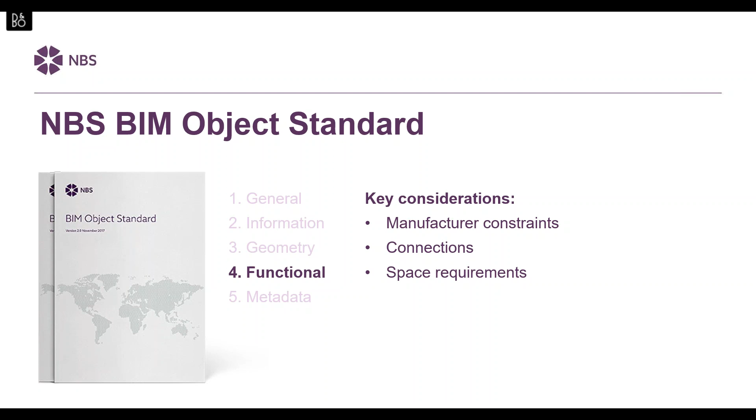So a door is a good example where it could come in 6 standard sizes, but an end user may actually want a bespoke size. So we just need to build in that sort of functionality. Things like connections: does pipework for a boiler, for example, need to be connected in a model? It most definitely would, so we just need to build in that functionality. We also need to consider things like space requirements, so access zones are really good to include.

And then finally, we need to think about how we name objects. I think it's just human nature that even across an office, somebody will call something completely different from somebody else. So we just need to be consistent in how we name BIM objects, the materials, the files themselves. File naming is quite important, and it does help if you save objects onto your server. As a designer, if the structure is correct and the fields are populated as they should be, it's then really easy to filter down and find what you're looking for.

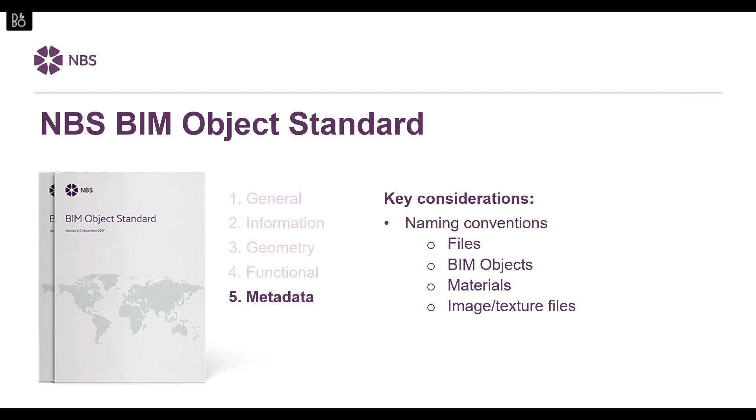So the final section for me is really to think about BIM object suitability. Not everything would need to be created as a 3D object. And I've got a few examples here on the screen. Some of these are to do with the software limitations themselves, and other examples are just products that you just wouldn't attempt to model to this level.

So if you think about the thousands of meters or even miles worth of cables that could be within a building itself, you wouldn't expect a designer to model each cable run. The software itself is quite intelligent, and you can do that in a more transparent and easier way than having to model to that nth degree. So cables is a good example.

This example here is plasterboard reinforcement tape. Again, for a designer, what they're concerned with on a plasterboard partition is they want to ensure that the room is the correct size. They want to know that the acoustic rating is correct, the fire rating is correct. They're not really concerned with some reinforcement tape across 2 boards. Does it bridge the wall and ceiling transition?

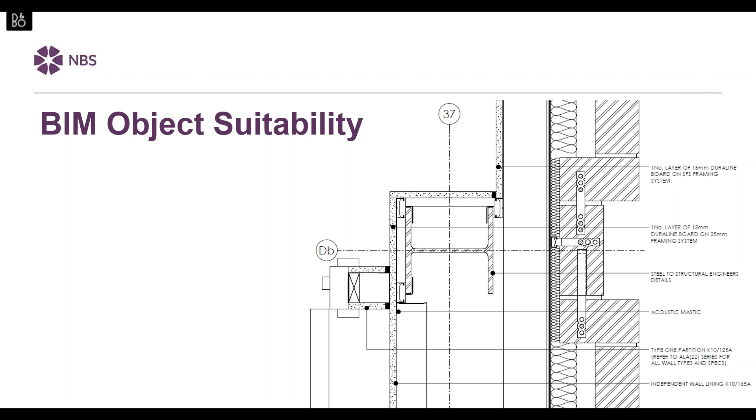So in this example here, you can see that you've got some masonry work there on plan. You can see that we've indicated wall ties, because wall ties are still an integral part, and they do provide a structural element to the building. So even though in a 3D environment we wouldn't expect designers to place thousands of wall ties, they are very much applicable and relevant to a 2D object. So there are varying criteria to what is suitable and what isn't, and certainly NBS can support you on that aspect.

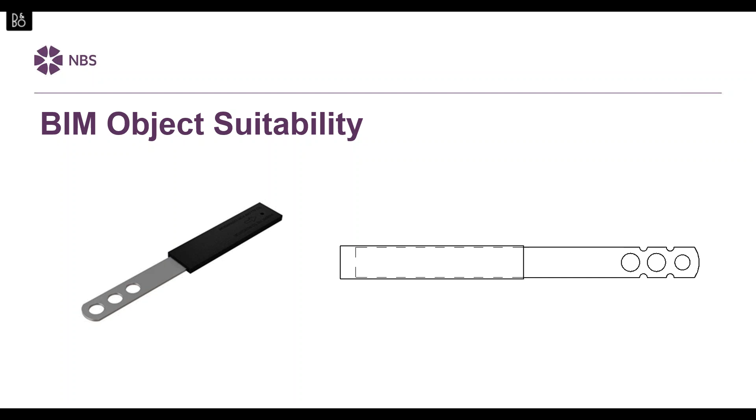So really that's what I wanted to cover today, just to give you an introduction to NBS and what we do in the library. I will hand you over to my colleague Jane Hibbert, who will talk you through the National BIM Library process in more detail.

Yep, so hello everybody, my name's Jane and I'm a senior BIM author. If you did sign a contract with the NBS National BIM Library, I would generally be the person who held your hand on the phone through the process and developed the BIM objects with yourself.

To start with, I thought I would go through the two types of contracts that we have. If you don't have BIM objects, we have an authoring contract. Here we collect your 2D CAD and your technical data sheets and transform that information into a BIM object with all that technical information attached, which Chris took you through earlier. There are steps throughout the process where we liaise with you to approve the information. So we do that whole process for you.

There is a certification contract. We understand that we can't create all of the BIM objects in the entire world, and there's lots of you on this WebEx who already have BIM objects.

What a certification contract is: we take your BIM objects as you already have them, we review them with regards to the NBS BIM object standard, and work with you to get them in line with the NBS BIM object standard and then host them on the library.

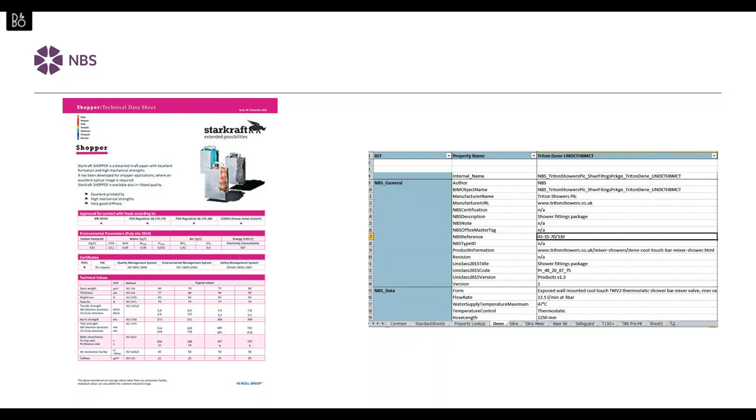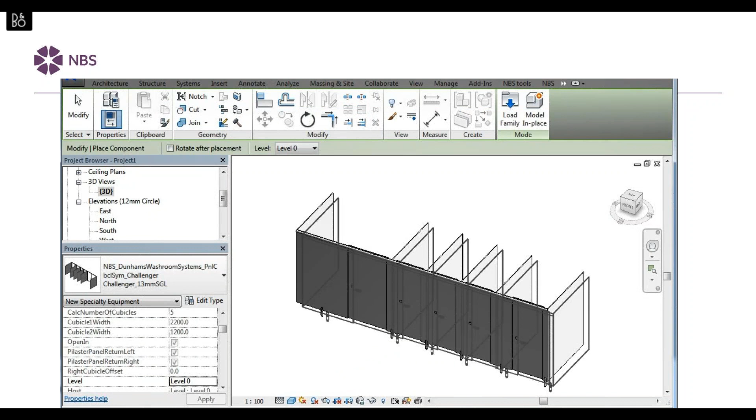The next stage is the 3D geometry. So we take your 2D drawings and convert them into a 3D world. It's not just the general look of things we need to take into consideration. If we are building a product that requires functionality, we need to build that into the object and still make it quite easy for the designers to use.

So when we're creating the 3D side of BIM objects, there's lots of functionality behind the scenes that we need to build in there. This cubicle, for instance, the accessible cubicle on the side can just be added with a tick box. For us to do that, there's lots of formulas and mathematics we do behind the scenes for this object to work in the simulation like it does in real life. That's an authoring contract.

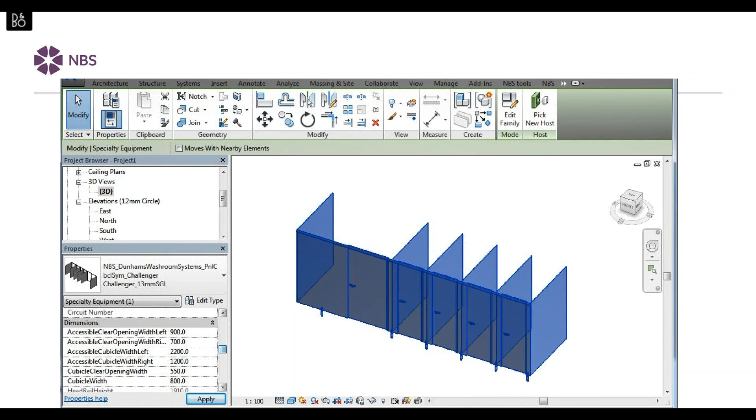For a certification contract, we take your BIM objects that you already have. You already have the 3D geometry for them. We generally review them with regards to the BIM object standard and the geometry section, just to ensure that they work in the BIM platform like they should, and are fit for purpose for the designers. I think the thing that a lot of people struggle with is the technical data and the structuring of that information. We do that for you, and again, we work together with you to create the web pages to promote your product on the website.

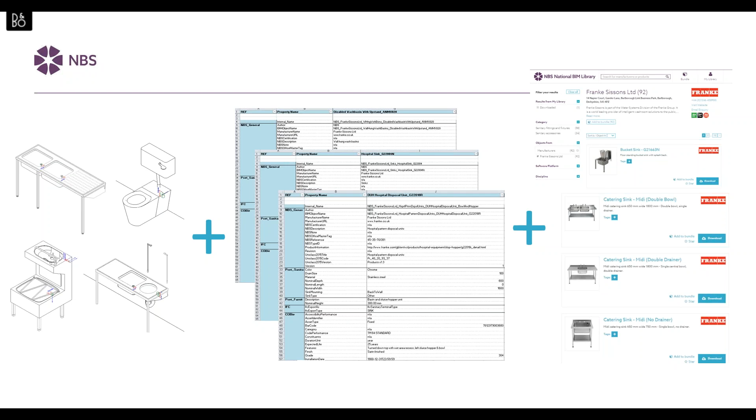So again, we'll work with you to collate the images for your products and the descriptions and how you want them named on the website, and make sure all your buzzwords with regards to SEO are all included in there. So when designers are searching the website, they can find your product with ease.

So what I'm taking you through now is the toolbar for Autodesk Revit that NBS have created. The first section that I'm showing is a mini version of the website within Revit. Historically, when people are downloading objects from the National BIM Library website, they take them from the website and download them onto their computer, add them into Revit, and add them to their project.

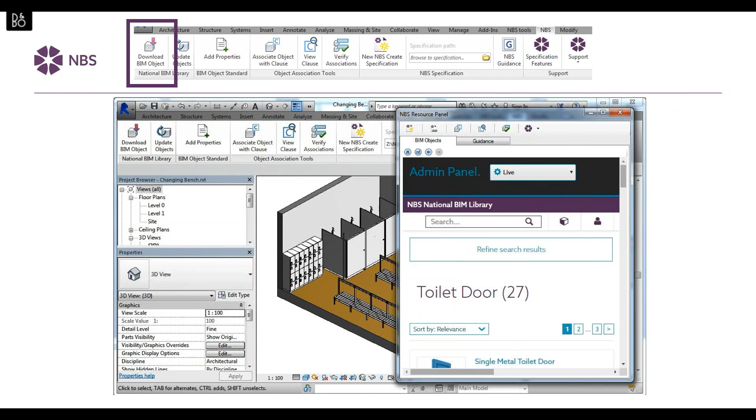This generally took 10 to 12 seconds in the workflow that we had mapped out. This tool allows you to add objects to your project with a click of a button. So you can imagine if you're building up an entire project, how much time that can save.

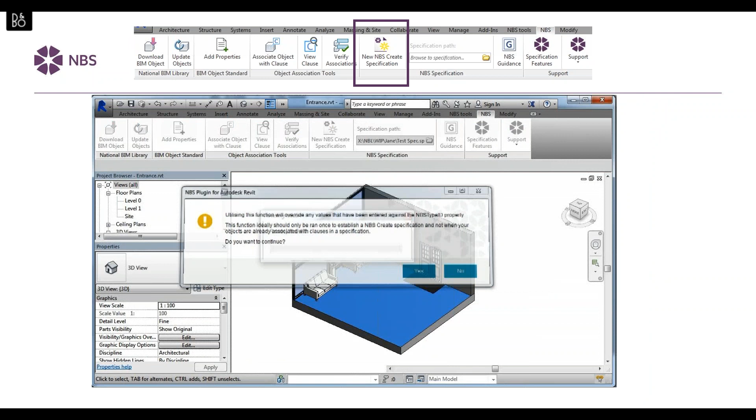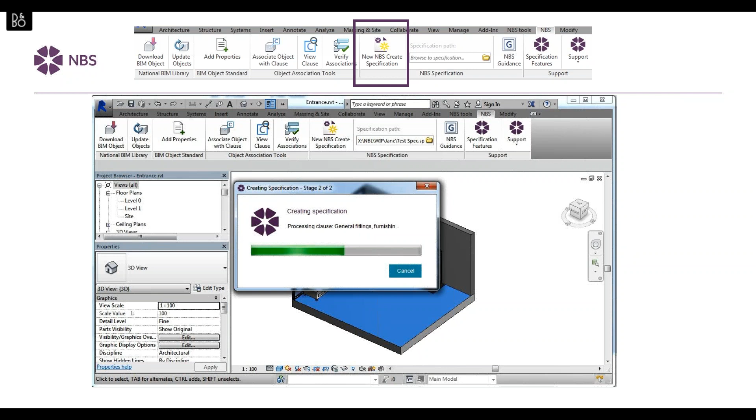The next function I'm going to show you is the NBS new specification button. So a designer can click the new NBS Create specification. The tool will run through the BIM object, pulling out all the NBS references and descriptions. This will then pull that information out and talk to our NBS Create software platform. It builds up a report and pushes it into Create.

For all of you that already have NBS Plus, the BIM objects and the NBS Plus listing then talk to each other. And when we open the NBS Create software, you can actually click on the Create sections and actually see your product specified. So it's starting to get products specified on the fly from BIM objects into your specification if you actually have NBS Plus and National BIM Library content with us.

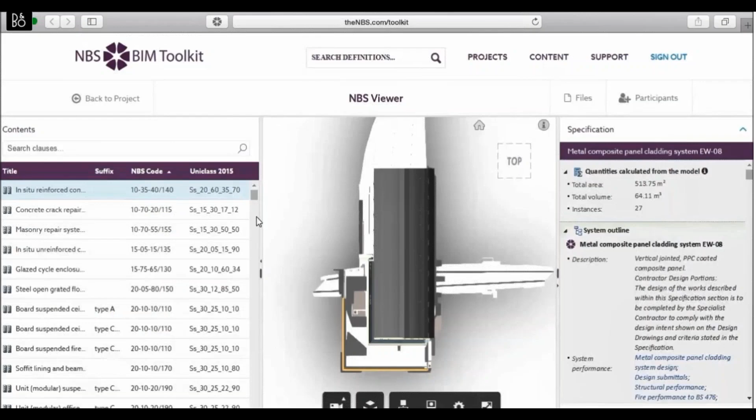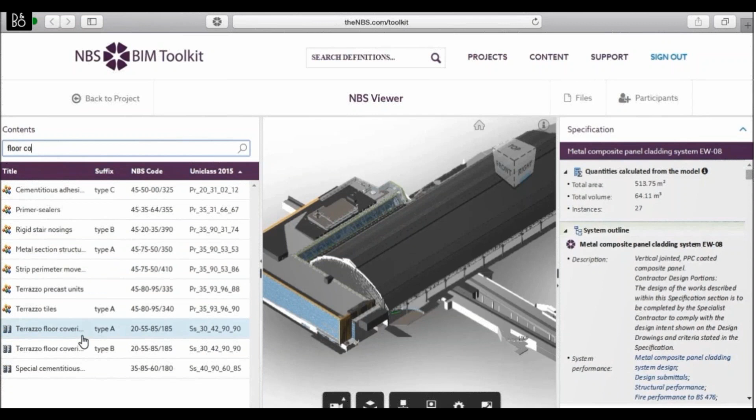One final thing I thought I would show you is the NBS BIM toolkit. So when designers have finished their project and have a finished specification, they can load them both into the toolkit and compare them. So an end user can click on any part of the specification, it'll light up and it'll be able to tell you the volume that it's using, how many instances the product is in the project, and you can start and build quite an intelligent report on what you need to do and streamline processes from that.

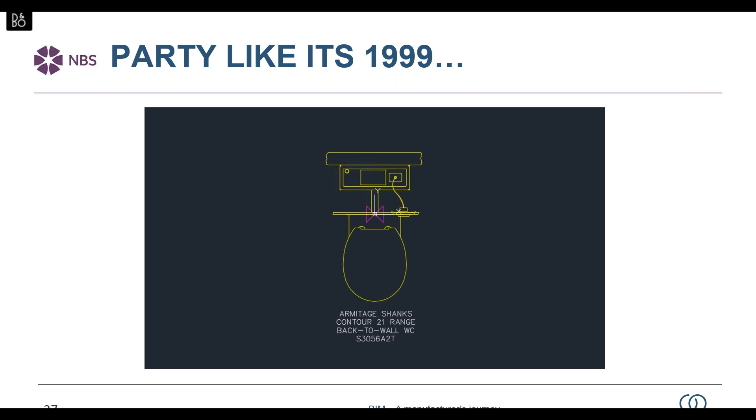On top of the geometrical things and obviously the detailing, the specification piece, which James just touched on quite clearly. We have to provide classification information, product declarations of performance, a whole host of different data surrounding our products for the specification phase, but also for the in-use phase. So O&M data can take up quite a lot of detail for your product.

And generally, to put it in simple terms, that's what a BIM file is. It's a combination of all of those things. So it starts with a 3D model. It's a little bit more elaborate than the CAD block. It has material finishes in. You can spin it around and do renders with it, and all the high visual side of 3D CAD. But as well as that, these models are actually intelligent. So that specification data and that O&M data is actually embedded into the file.

So whereas previously with CAD, the series of lines on a drawing would have taken the human brain to interpret as a toilet pan or a house, the BIM models actually know what they are. The one that you can see on the screen is a toilet pan. This model will know it's a plumbing fixture. It will schedule accurately, and it also has things like flow rates and connectors, etc. And that kind of information is replicable for all of the different products in the sector.

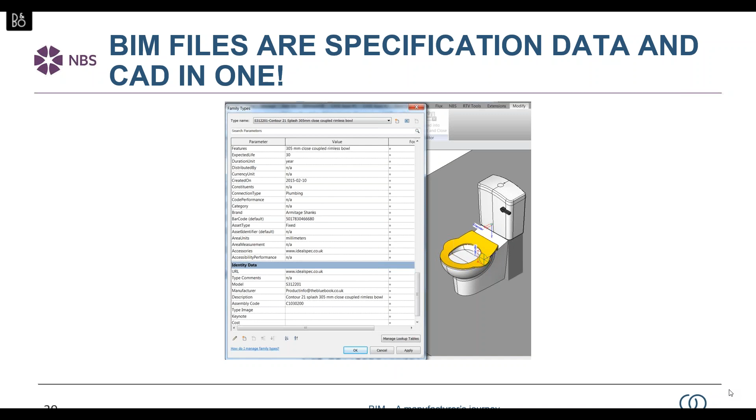So what lessons did we learn? Well, the first thing is you can't make everybody happy. No matter how much you try, there will be personal preference with all of your clients. They will have their own individual ways of doing things. But what you need to do is try and get that best fit, the scenario and solution that fits all. And that can come in the data or the geometry.

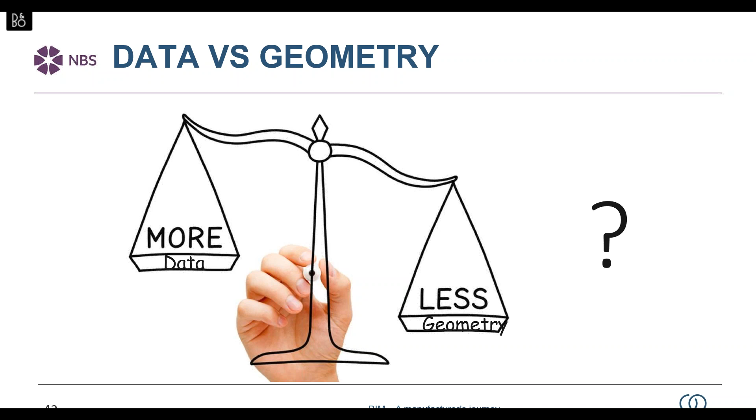Some people might want more geometry. They might want to be doing high-end visualizations, renders, even virtual reality with these objects. Some people might want it just for spatial planning. And then comes the data. People might want less data in the concept stage, but if they're in the technical design stage, around stage 4, or even at the handover when it's coming to facilities management, data is very, very critical. So it's finding that right balance.

Maybe that's what we have with BIM today. There's been a lot of different formats, different standards, ways of doing it. In the UK, Revit seems to have become the most popular platform, and it seems to be standardising the way BIM's created.

Some stumbling blocks. Going back to the pleasing everybody scenario, too much detail could result in bloated files. Chris mentioned earlier about not having too large a file size because the computational power can slow the project down. That will obviously alleviate as time moves on, but for now it's quite important.

Deciding how you want your files to host. I mentioned earlier that these objects are actually intelligent, so the toilet pan that I showed you would know it needs to snap to a floor because it was a floor mounted pan. You might want things to snap to a wall, or you could need generic objects if they are able to be positioned in different places. And then also getting the correct material finishes in. You can go completely to town with the rendering ability on these things, but again, you're adding more data, so it's trying to find that correct balance.

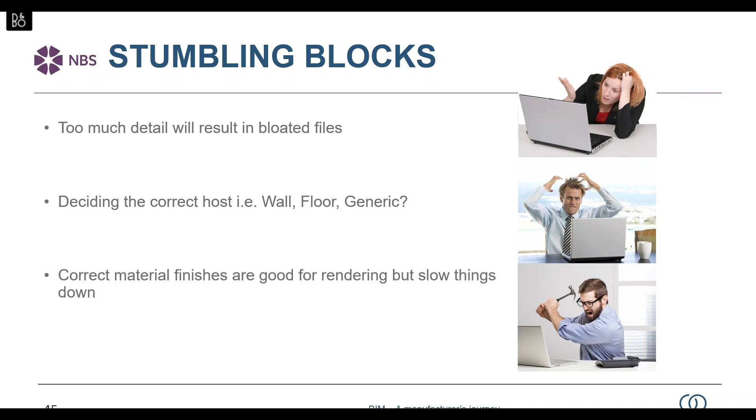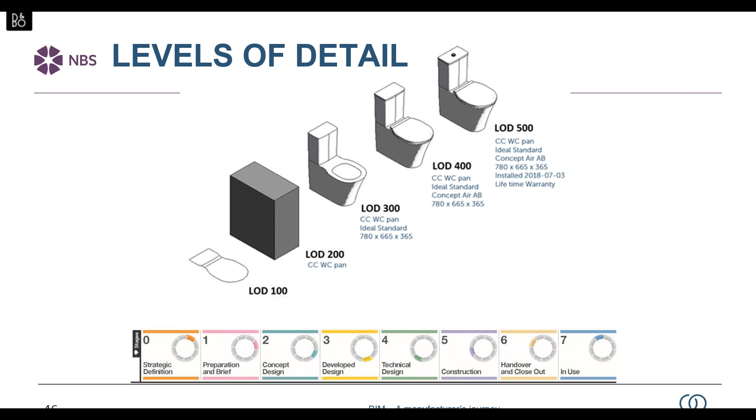And then there's levels of detail. So throughout each stage of the project, people want different amounts of information, whether that's graphical or non-graphical. There are level of detail standards to interpret this, but again, it's a whole set of information that you need to interpret.

Which brings me nicely onto the I in BIM. So BIM, building information modeling, the information is the key part there. It's very easy to get sidetracked by the geometry because the high visuals are quite appealing and satisfy the brain from a pleasing point of view. But the information is really where BIM comes into its own. Now at the concept stage, that might not be too important. At the technical design stage, it becomes more relevant.

So when we mentioned the COBie data earlier, or achieving BIM level 2, what COBie does is it provides all of the manufacturer's information. That includes things such as your warranty, barcodes, all that kind of thing, the kind of information you will need to install and specify this product at the first stage, but also to allow that information to pass through into the asset management phase. So for a facilities manager, or even in a residential piece now where you're handed the pack digitally for a new home, that information is quite critical, and having it in one place is very, very important.

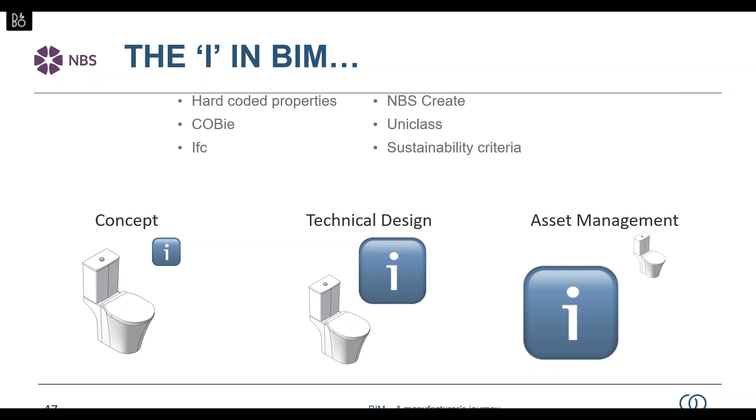Which leads nicely onto a common data language. Going into that data, you would have seen on the screen when Jane was showing you through the different COBie information, there are roughly over 100 lines of data that could possibly be put into each object. Now, if a typical residential house has around 3,000 components, that's 300,000 lines of data that somebody's got to tie in. That's where the BIM manager role tends to come in on projects these days. So if we can name all these parameters in a structured way and have this universal language, it makes that job a hell of a lot easier and keeps that information much more tidy.

BIM objects can vary in quality. There's good BIM, a whole lot of bad BIM out there. You might trust a party such as the NBS to create the objects for you, so you know they're going to be checked against standards and correct. You could have a go at it and get it wrong. You could even trust somebody you know, or a reseller that might be doing this a little bit cheaper. But again, is it going to be compliant? You might even decide to do this yourself, but then obviously you've got to go through all the stages we went through previously to get to this level.

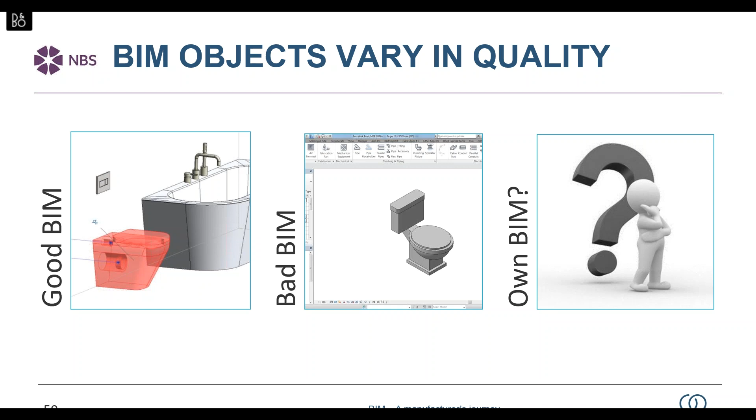And then the standardizations. With anything contractual, obviously norms come into place. The PAS 1192 series and BS 8541 stipulate most of the standards surrounding BIM content and how it needs to perform in the whole construction arena. It can be a bit of a minefield. There's a lot of things to go through. But there's a lot of help about. I'm going to talk to you about where to look next.

So the light at the end of the tunnel for us was the National BIM Library, particularly when they introduced the BIM Object Standard. Now, we're going back probably 3 or 4 years to the first edition. We'd been creating content for around 12 months before this, but our data wasn't standardized enough. We thought we'd got it completely right, but it turned out it wasn't, which resulted in quite a bit of rework for us. The BIM Object Standard guides you through that step by step. It can be quite intense. As Chris mentioned earlier, it's a little bit heavy for bedtime reading, but it does guide you through that process.

And in that, basically, somebody had gone through all of these standards and done all the hard work for us. They picked out the key elements, what we needed to comply to, and it just gave us that step-by-step guide to actually get the content correct.